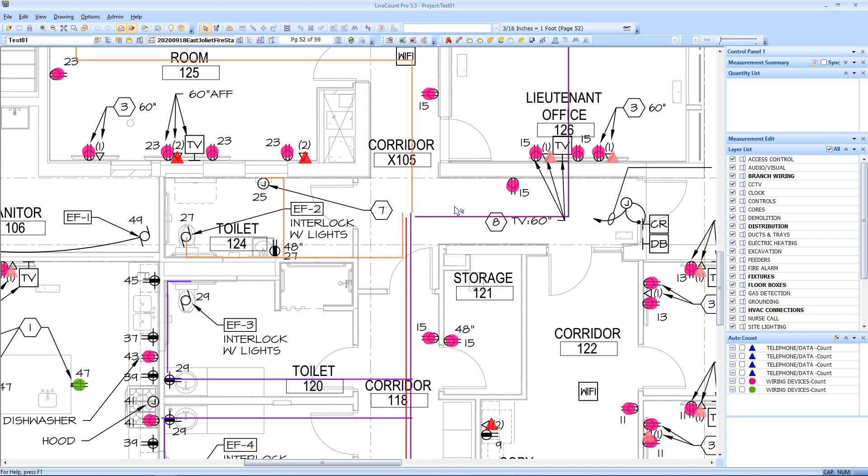So we're figuring that we're going to have a meeting point, and eventually all our home runs are going to come to this point right here. Now we have to head back through here, down the corridor, or through the wall of the mechanical room, however you want to take it off, and we got to hit panel A.

Now there's something called a 2-point, or add 2-point lines. Now I may be using it the wrong way, but I figured out a different way to use it, and I've been still playing with it, but this is pretty neat. So what you can do is, it's not even just 2 points, you can actually create multiple points. You could create essentially a path, and you could select a conduit to that path, and it essentially just takes it off for you. It's just not showing you.

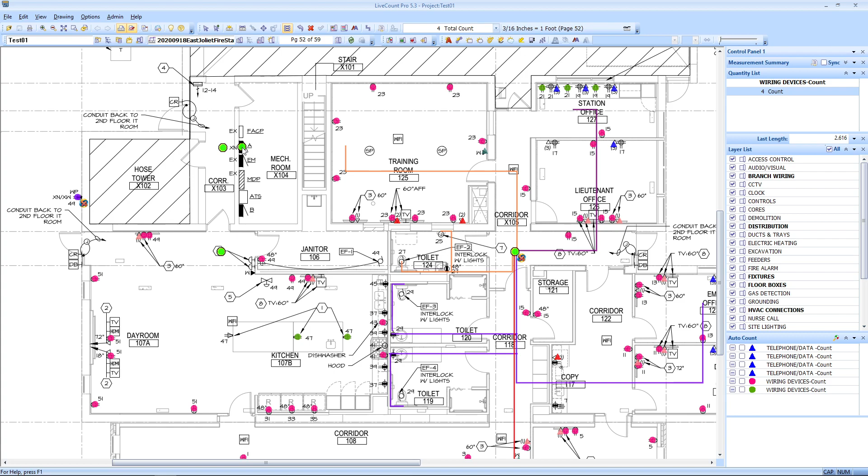So we're gonna demonstrate this, stick with me. I'm gonna be clicking a lot of buttons because the way it is, it's more points versus length, so I'm doing this in a different way, and it does work. We're gonna go slow so you guys can see. You're gonna click to add 2 points, we're gonna start off from here, hold your control or hit your orthogonal polar mode, and then we're gonna come down here, go up, and then go over. Right click this, hit edit trace, and then we want to change this to a length.

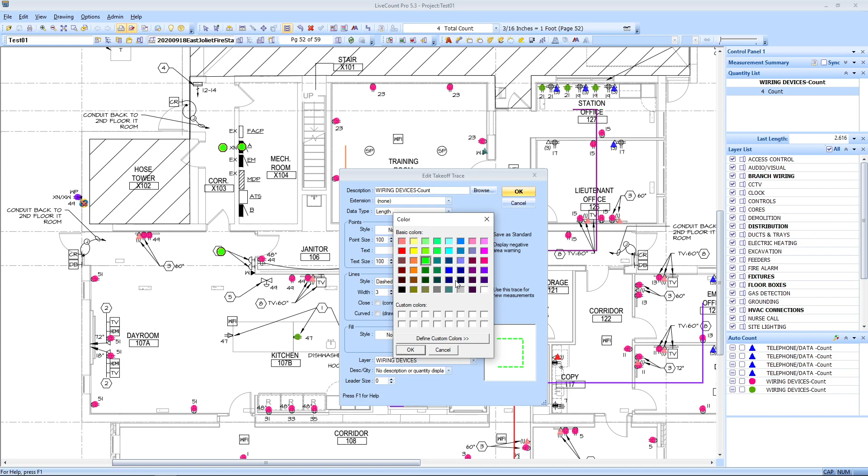Take off the points too for lines. We want some kind of line there, so we'll make it distinguished, and we'll do it as a dashed line, and we'll pick something else to stick out. Let's do blue. Okay, we'll keep the thickness at 3, that's fine.

Oh, why is there a break now? Hold on one second.

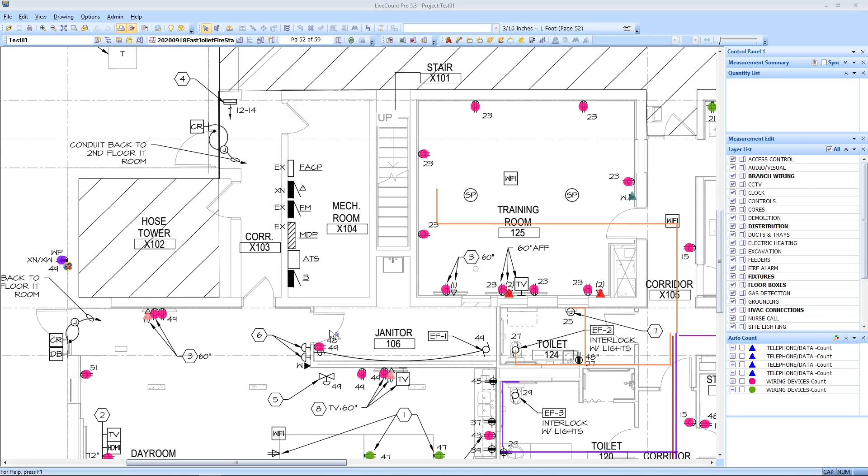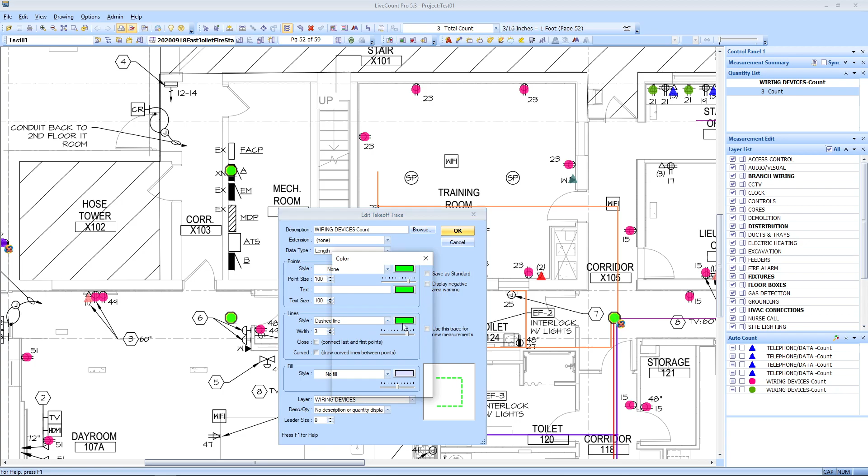So I just learned something as I'm doing this, because I did it with 3 points. Here's what happened: when you click add 2 points, you could click 1, 2, and then go straight to the panel, hit edit trace, no points, you want to do a line, we'll do the dashed line, we'll make this the length, and we're going to call this blue. And you see that it only did 1.

So there's a 2 points, so how this works is you have to click this twice. So if I go here, it'll connect it again, and then basically you're just gonna hit enter, and then this is basically now like a measurement. So you're gonna hit edit trace, and we're gonna keep this as is, and we're gonna jump into Accubid, and I'm gonna show you the trick on doing this.

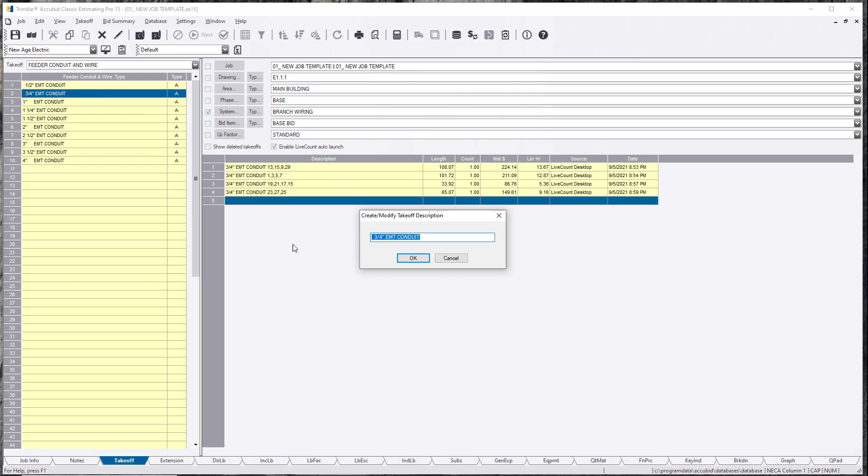If you use your feeder, conduit, and wire, you're able to run conduits in parallel. So for this case, we're gonna do EMT steel 3/4 inch, hit OK. This is gonna jump us into LiveCount. What you're able to do is you can hit the select button, select this length, and hit return. What that does is it sends that exact length right over.

The curious thing about this one is that you can do parallel runs. So in this case, we have 1, 2, 3, so we have 4 parallel runs going back. We're gonna say this is 4 parallel runs, hit OK. We're not gonna put any supports in this one, but we're gonna put the wires so you could see. We're gonna say 9 conductors and 4 runs, and wire makeup, since this is feeders, it's usually higher, so you can change this to a 5. Hit OK and hit finish.

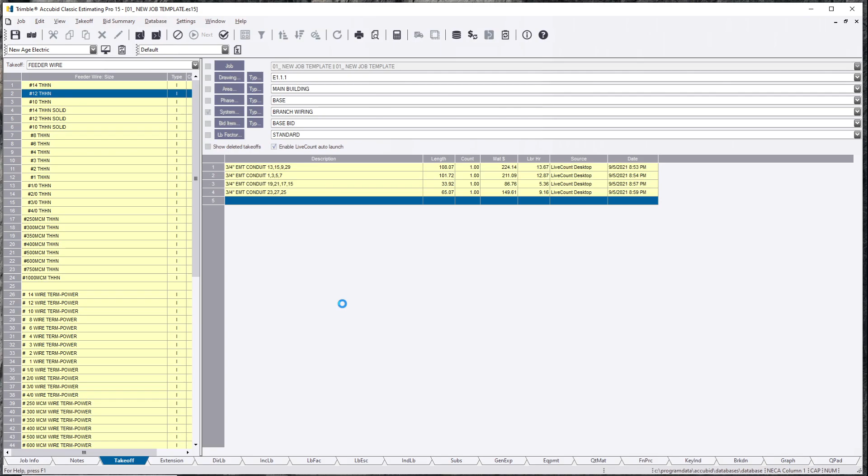Now when we jump back into LiveCount here, this measurement now reads that 3/4 inch conduit. Pretty cool trick, I've never used it.

It's pretty cool. You might have a long corridor where you could just say, I'm gonna make this my length, so I'm not drawing all these conduits coming down. That's one way of using it. You can just do a feeder conduit and X this out and do that. But I've never really seen this trick before, and it's a pretty cool feature in the program. I can't see another reason for doing it.

I've been trying to look this up and find different ways to use this specific command, and nothing's there. But it's a really cool feature. Keep in mind, the downside is I can't add any drops to this.

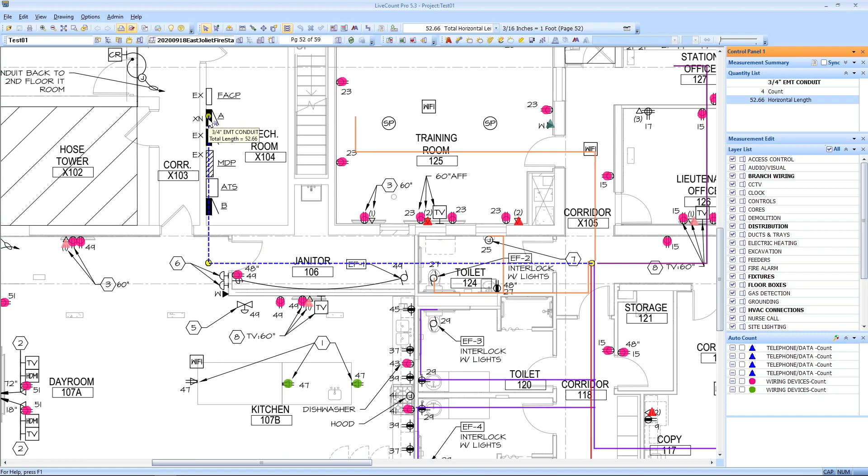So you might have 8 feet times 4. You've got 32 conduits dropping down that you're not taking into account with all the wire and your connectors too. So that's not there. And then I believe you cannot change this to anything else. It is a length. It's showing it.

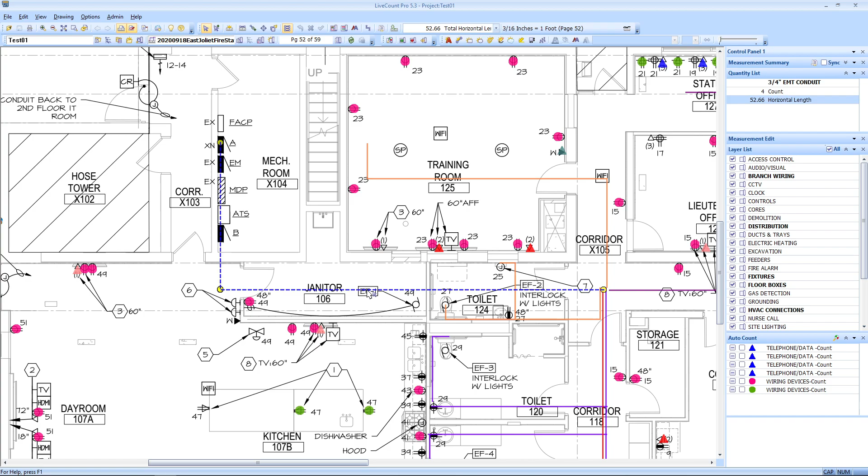Let me change this to branch wiring. Yeah, see, there's no way to do it because it's reading it almost as a takeoff measurement versus like a home run. When you look at this, you're supposed to get this option, but when you do this, it doesn't give you that option anymore.

So it's an interesting feature, but I like it. This is pretty cool. You could probably take it into account in the program. You might want to add a couple 40 feet for the drop at the end, but that's pretty cool.

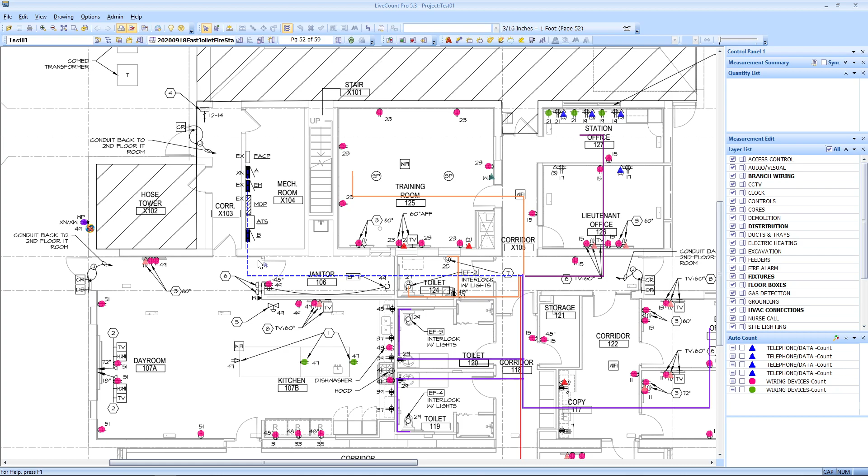There are certain programs that aren't takeoff programs. I know in Autodesk Revit, I don't know the exact name for it, but it actually auto routes all the conduit and connects all the devices together, and puts in boxes and everything. I saw this way back, maybe 2012 or 2013, so about 9 years ago. It was a cool feature. Nobody has it in a takeoff software that I know of, but that is an awesome feature.

And yeah, I thought this program did something like that, but hey, it's a cool feature. You might see this right now, and the light bulb above your head might click and say, hey, I can do this for something.

You can actually do this for, let's say, data. Data is actually a good thing because depending on how you do your data drops, I like to keep the downs built into the actual data assembly. So my particular drop for this has another 20 feet for the ends, because most of the time we're running this stuff like in J hooks or bridle rings, and I keep everything buried in there.

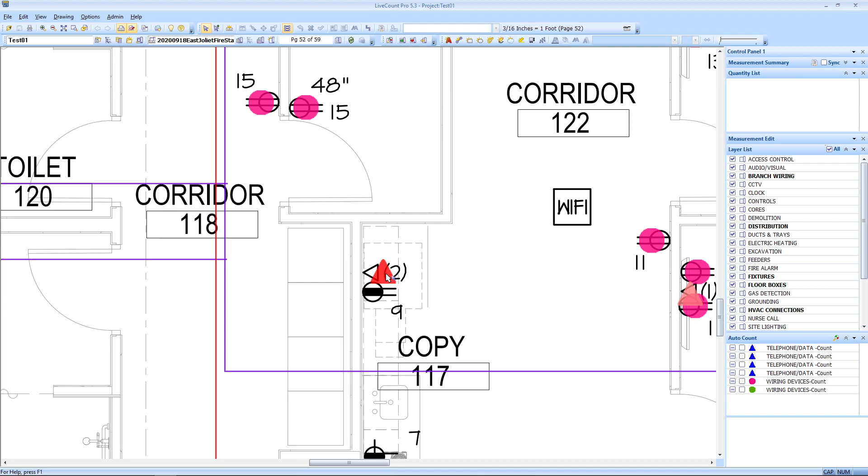So if you happen to run everything down this hallway, let's do it really quick. Let's jump into here. We're gonna say teledata, and we'll just do the cabling, and I'm gonna go to my common assemblies, voice data systems. Yeah, we'll do this one right here.

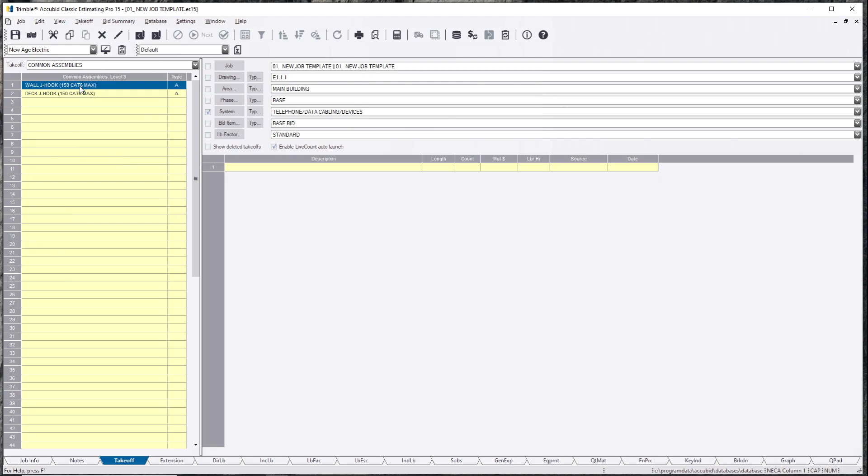For this case, I'm gonna say we're gonna bring everything to the same point over here, and then what you could do is, I'm gonna get rid of the J hooks, because I could probably put that in separately since the way I'm gonna do it is gonna be different. So we can delete this, hit OK. Okay, so that's taken off.

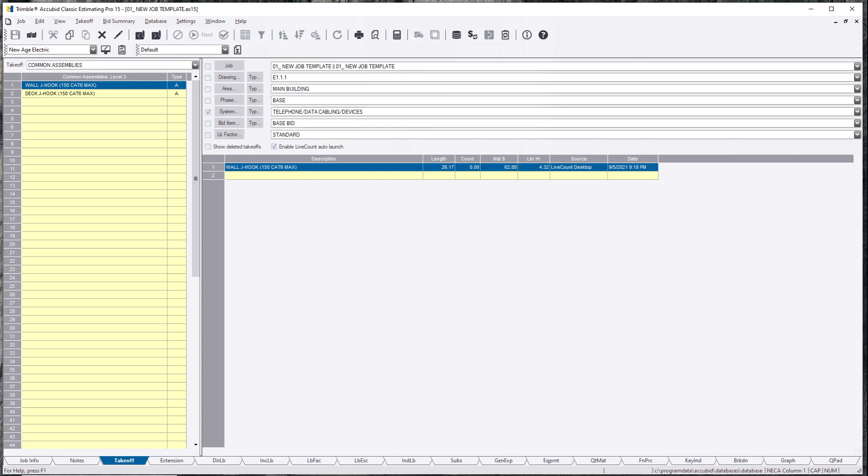Now I'm gonna jump back into LiveCount, and I'm gonna do that at 2 points. I'm gonna do this one and then this one, and I'm gonna do it one more time so it goes all the way through. Then now when I hit edit trace, I'm gonna change everything to length, dashed line. We'll do this one that color. We'll say telephone data.

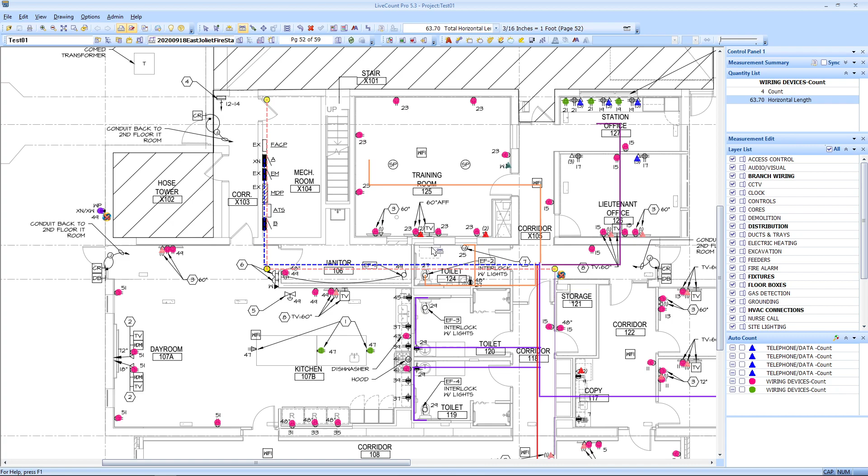So now you've got this home run that has nothing really there. What you can do is, when you got this all figured out, you bring all these locations to that point, and then if you know all your drops after you count them, all you have to do is go in Accubid, and we're gonna just click the same one really quick. We're gonna select that length and hit OK. So that's gonna transfer it.

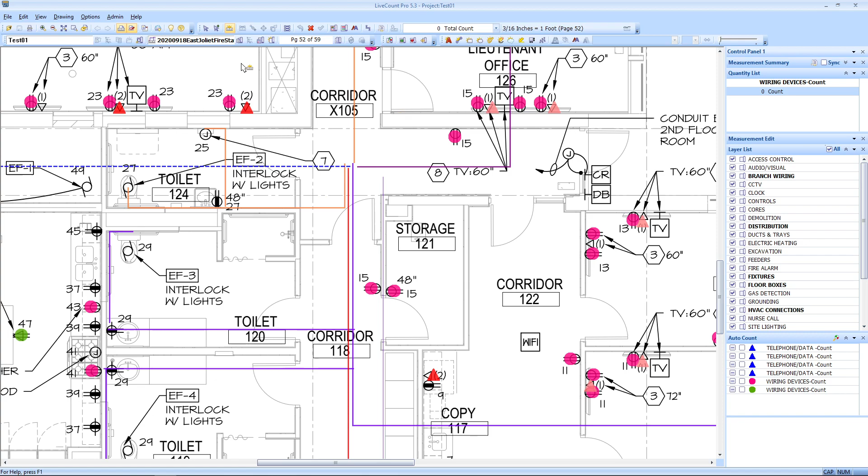I'm sorry, you should have seen that. So I'm gonna do this one more time. Sorry. I'm gonna select the measurement and hit OK.

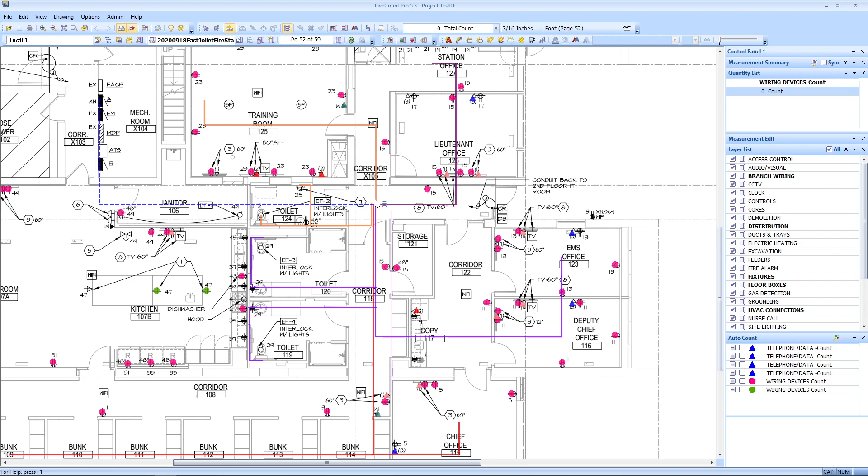I gotta create that measurement one more time, it actually disappeared, or it's not turned on. Nope, it is on, so I gotta do it really quick. I'm just gonna go click, click, click, and we're getting this all the way to the back. We're gonna go to edit trace really quick and turn this to length, turn that off, and I'm gonna do dash lines here, and we'll hit teledata. Okay.

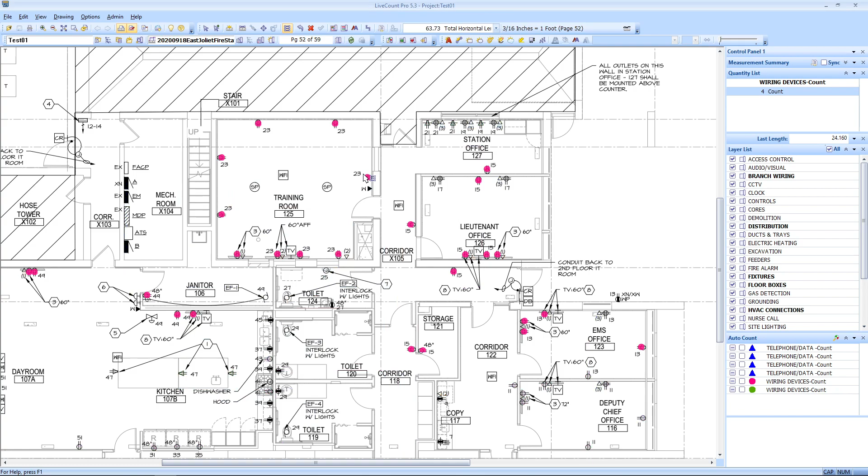Hit enter for OK. So now we're gonna jump back into here, reactivate this. We're gonna select that, hit OK. That's there now. And then here you can take out the J hooks, or you can put the J hooks in.

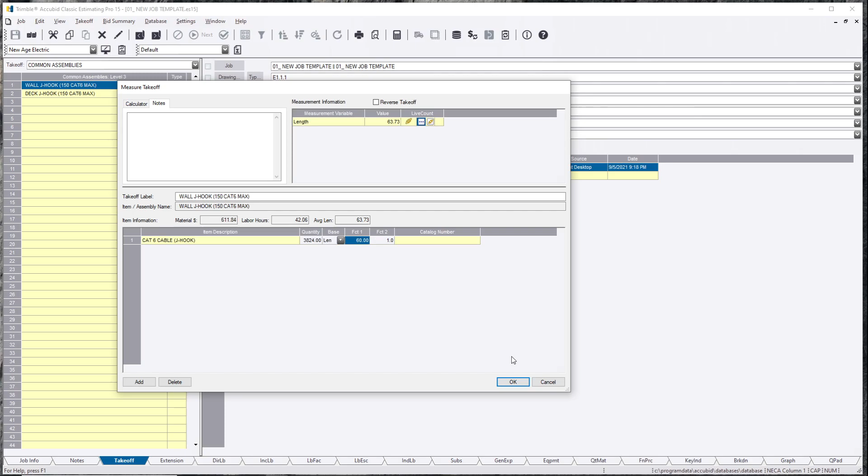And this is my CAT6, and let's say we counted all these drops, and we're running 60 cables down that J hook. So now when we go back in here, that one line and that whole home run basically has your J hooks and 60 different cables in there, and then your drops are already located in here. So there's a lot of ways you can utilize that.

Hopefully maybe it hits a light bulb for somebody, but it's a cool feature. If anybody else has seen a different way of doing this, let me know. I've only learned one way, and that's my way, but if you guys have anything else, let me know. I'd love to hear it.